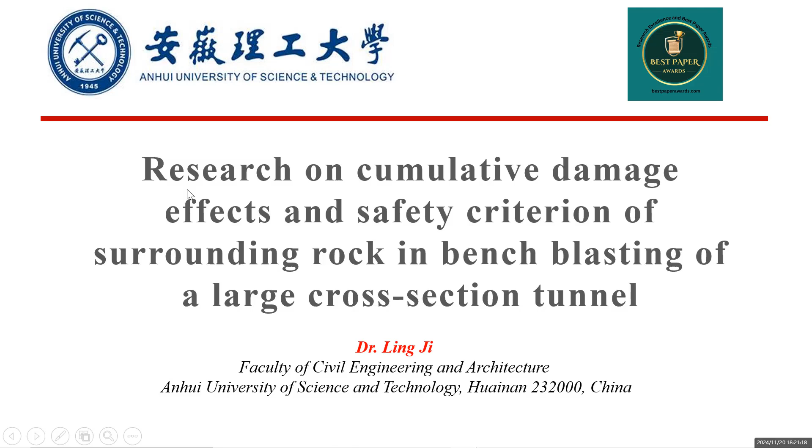Next, I will briefly introduce my award-winning work. My presentation will cover the following four aspects. Firstly, I will introduce the purpose and significance of our research. The drilling and blasting method is widely used in underground engineering construction, especially in tunnel excavation and mining operations.

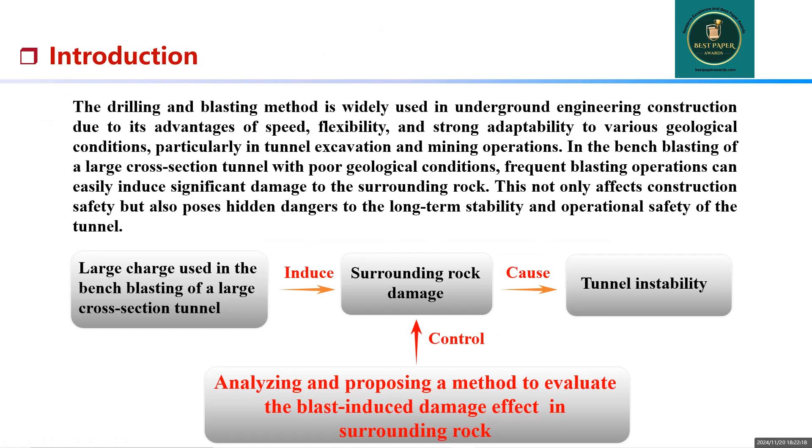In the bench blasting of a large cross-section tunnel with poor geological conditions, frequent blasting operations can easily induce significant damage to the surrounding rock. This not only affects construction safety, but also poses hidden dangers to the long-term stability and operational safety of the tunnel. Therefore, it's crucial to analyze and propose a method to evaluate the blast-induced damage effect in surrounding rock.

Secondly, let me introduce the research methods used in our study. In this work, we develop a numerical simulation method to investigate the surrounding rock damage effects caused by blasting in larger cross-section tunnels. While simulating the detonation process of explosives within surrounding rock presents a relatively accurate and widely utilized method for analyzing blast-induced damage effects in surrounding rock,

it can become cumbersome and computationally expensive when simulating the detonation of numerous blast holes. To address this challenge, a simplification method in simulation proposed by previous researchers was adopted in our study. For the cutting holes per delay, the envelope line of the crack zone surrounding the blast holes can be treated as the equivalent boundary, with the pressure history applied to it by equation 1 in PPT.

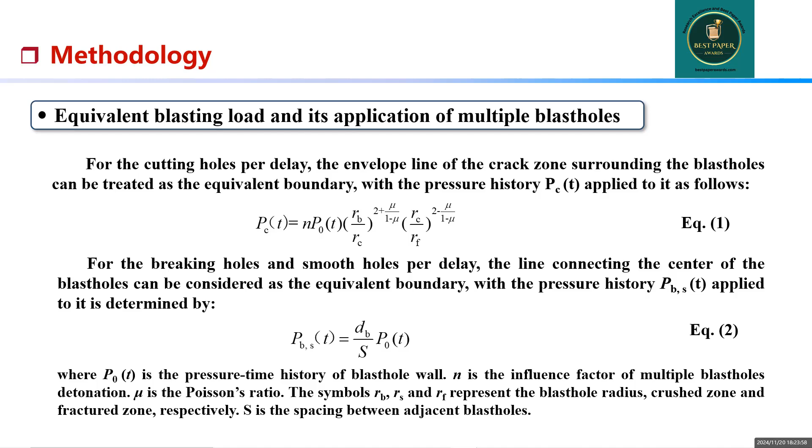For the breaking holes and smooth holes per delay, the line connecting the centers of the blast holes can be considered as the equivalent boundary, with the pressure history applied to it determined by equation 2 in PPT. In our previous work, a damage constitutive model integrating the tensile damage model proposed by Yang et al. with the Drucker-Prager yield criterion was established to simulate the blast-induced damage in rock.

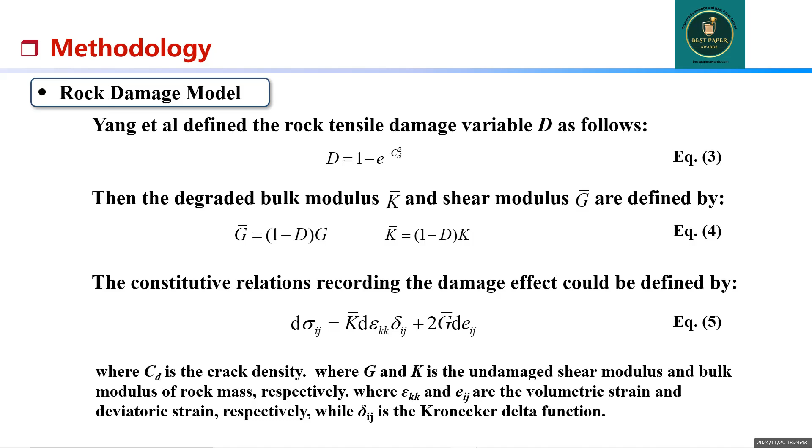In the model, the rock damage variable is defined as the probability function related to crack density. According to Hooke's law, the incremental constitutive relations describing the damage factor can be defined by equation 5. When the rock mass isn't subject to tensile failure, the strain-stress relationship of rock mass is modeled by the Drucker-Prager yield condition as equation 6 in PPT.

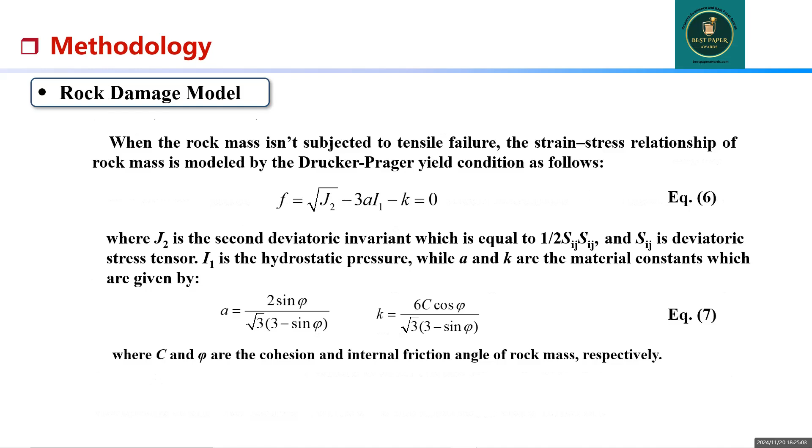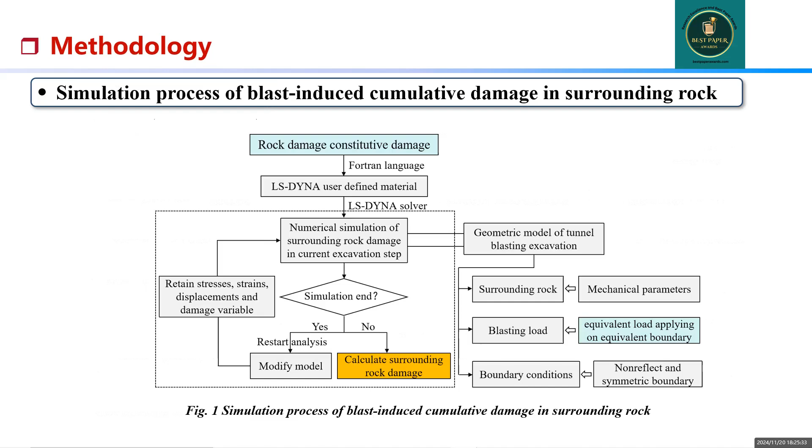Picture 1 provides a schematic diagram of the calculation process for blast-induced cumulative damage in surrounding rock. In this study, we employed the method shown in Figure 1 to simulate the cumulative damage of surrounding rock with different properties in the bench blasting of a large cross-section tunnel.

Next, let me introduce the application of the developed numerical simulation method in practical engineering. We selected the Longnan tunnel of China's high-speed railway as the research background. The Longnan high-speed railway tunnel connects Jiangxi province with Shenzhen City. This tunnel is a single-tube, double-track structure spanning 10,244 meters in length, with a large excavation cross-section measuring 140 square meters.

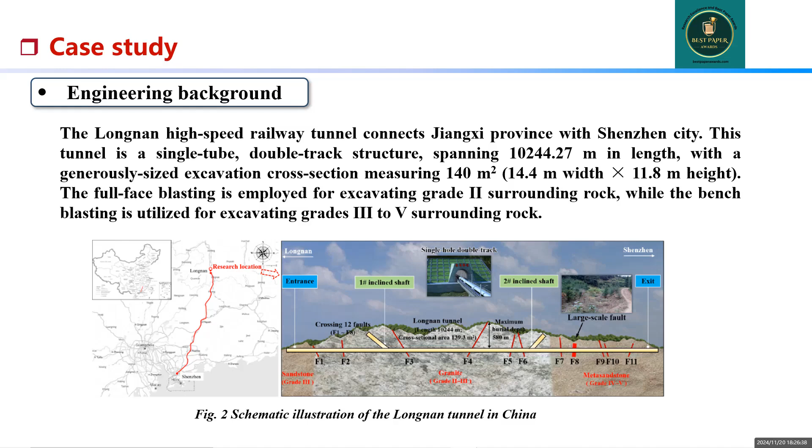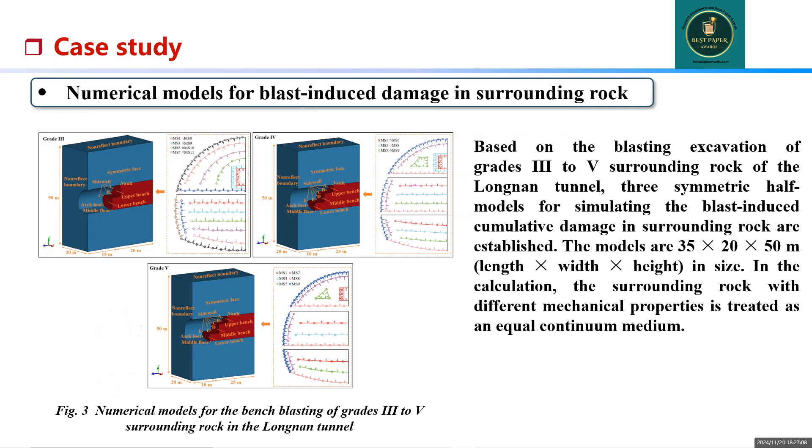Full-face blasting is deployed for excavating grade 2 surrounding rock, while bench blasting is utilized for excavating grades 3 to 5 surrounding rock. Based on the blasting excavation of grades 3 to 5 surrounding rock of Longnan Tunnel, 3D numerical models for simulating the blast-induced cumulative damage in surrounding rock are established. In the calculation, the surrounding rock with different mechanical properties is treated as an equivalent continuous medium.

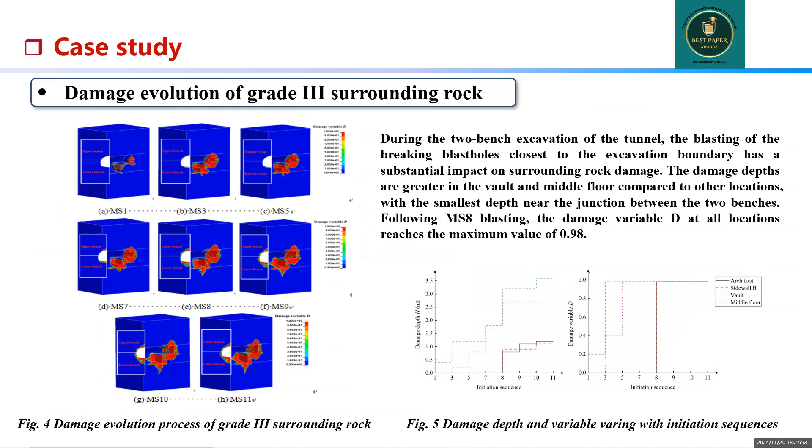According to the simulated results, it is found that during the two-bench excavation of the tunnel with grade 3 surrounding rock, the blasting of the breaking blast holes closest to the excavation boundary has a substantial impact on surrounding rock damage. The damage depths are greater in the vault and middle floor compared to other locations, with the smallest depths near the junction between the two benches. Following MS8 blasting, the damage variable at all locations reaches the max value.

For the tunnel with grade 4 surrounding rock, the blasting of the breaking holes closest to the excavation boundary has a significant impact on surrounding rock damage, while the damage depth influenced by smooth holes blasting is minimal. The vault and middle sidewall of the middle bench experience the greatest damage depths, followed by the middle floor, with the smallest damage depths near the junction between adjacent benches. After MS7 blasting, the damage variable at all locations of the excavation cross-section reaches the max value of

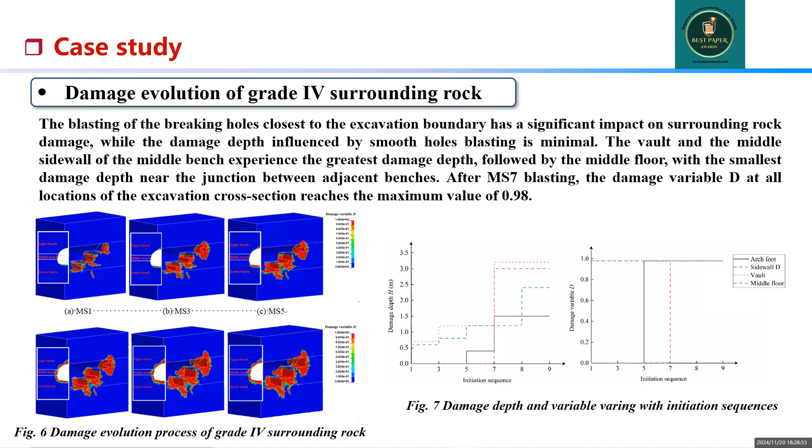0.98. For the tunnel with grade 5 surrounding rock, as the blast holes with different delays are sequentially detonated, the damage area of the excavation cross-section gradually expands towards the middle bench, while the damage depths at the junction between adjacent benches remain relatively small. Following MS7 blasting, damage is obvious at all locations of the excavation cross-section, with the damage variable reaching a maximum value of

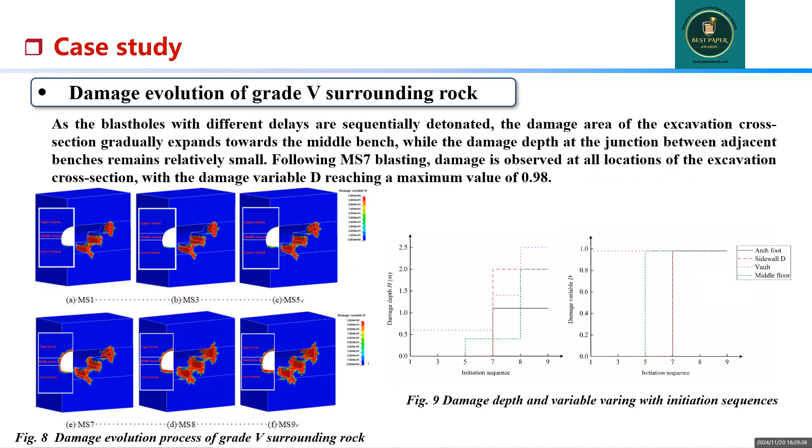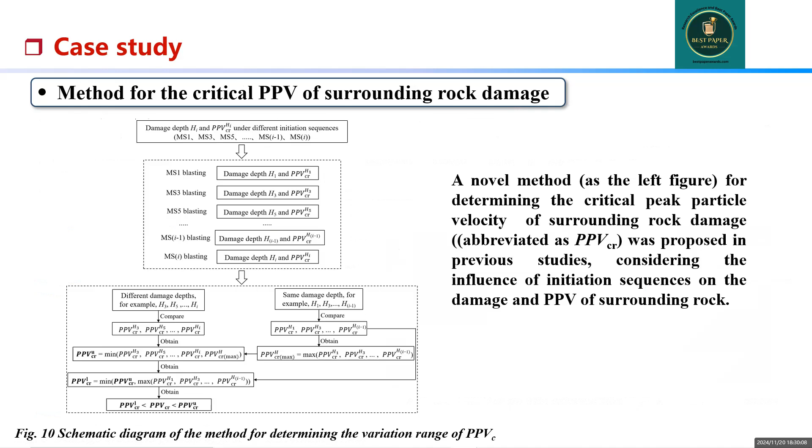0.98. The method in the left figure for determining the critical peak particle velocity of surrounding rock damage, abbreviated as PPVCR, was proposed in previous studies, considering the influence of initiation sequences on the damage and PPV of surrounding rock. According to the proposed method, the variation ranges of PPVCR for grades 3 to 5 surrounding rock are summarized in the following Table 1.

From a safety perspective, the minimum value across all locations is taken as the PPVCR to control the cumulative damage in surrounding rock. By comparing the values at all locations, it is determined that the PPVCR for grades 3, 4, and 5 surrounding rock is 16.8 cm per second, 13.7 cm per second, and 11.5 cm per second, respectively.

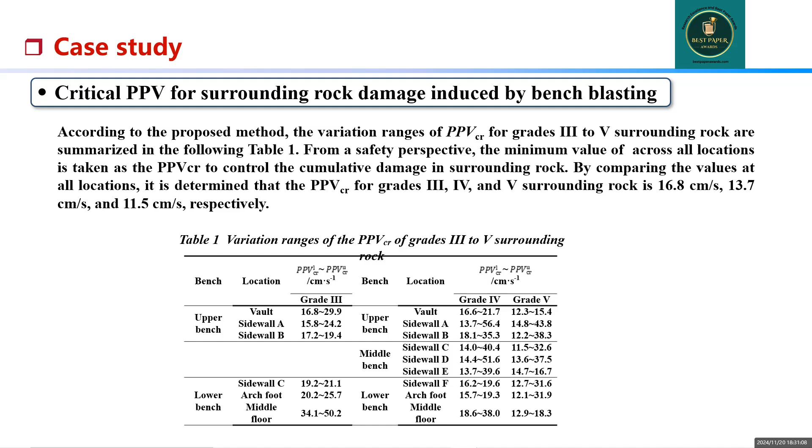Finally, I will present the research conclusions, which include 3 key points. As mentioned in the previous case studies, they will not be elaborated here again.